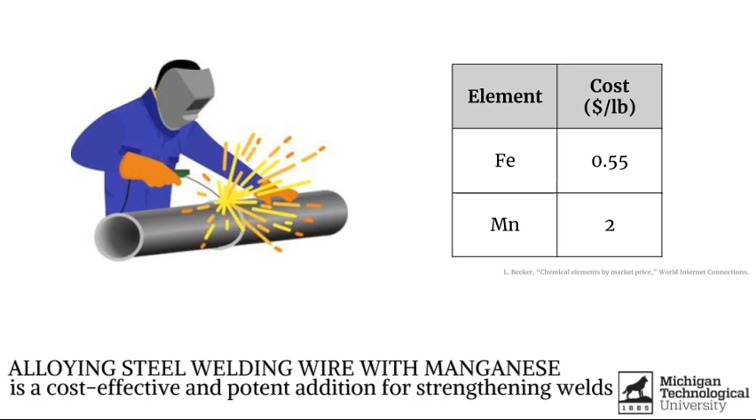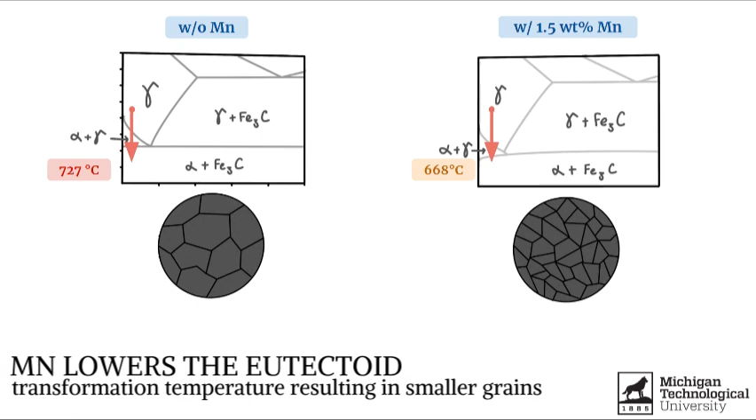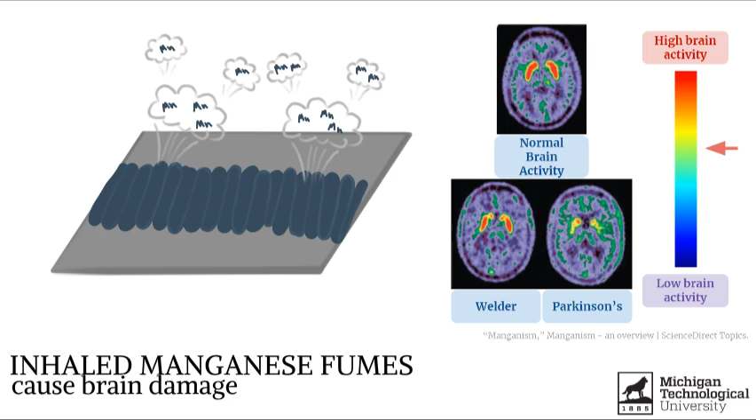Hobart manufactures welding supplies, and one of their main products is solid steel welding wire. Manganese is commonly added to the wire because it is a potent addition for strengthening welds and is also cost-effective. The reason manganese is effective at strengthening is because it lowers the eutectoid transformation temperature, which allows for more nucleation during cooling, resulting in a smaller grain size. Despite these advantages, manganese is a big health concern because during the welding process, manganese fumes are produced, and these inhaled fumes can cause brain damage similar to Parkinson's disease.

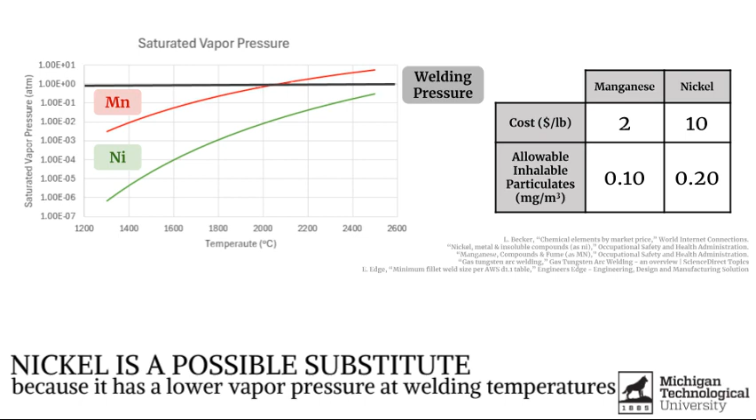Nickel is one possible substitute for manganese that our team has been exploring. It has a lower saturated vapor pressure than manganese in welding conditions, meaning it will not vaporize in the welding process. However, nickel is 5 times more expensive than manganese, so we are trying to find the balance between health risks and cost. Similarly to manganese, nickel also lowers the eutectoid transformation temperature, which again promotes nucleation over growth of the ferrite during cooling.

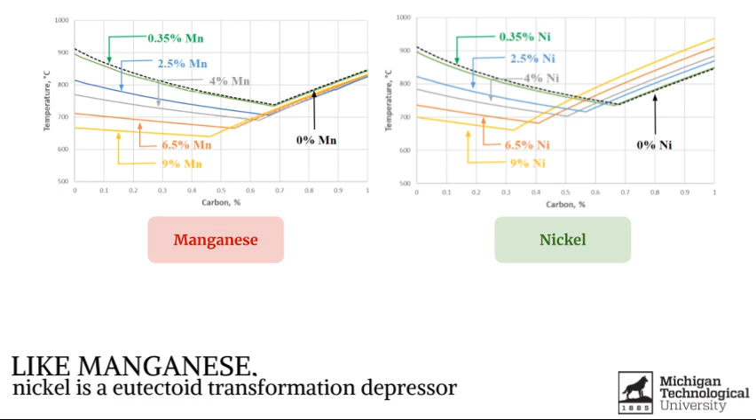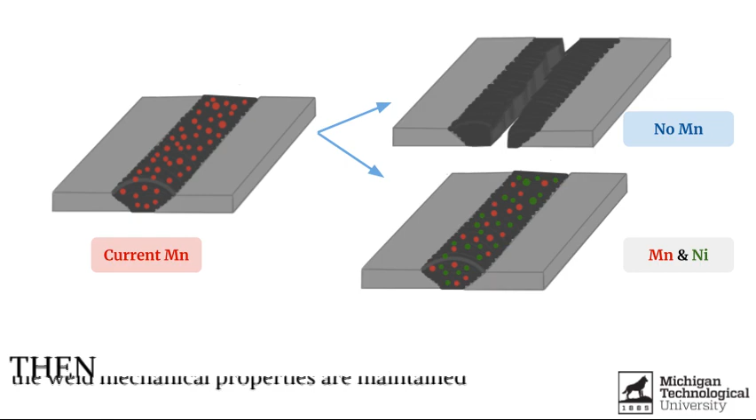This leads to a finer grain size in the microstructure, which helps strengthen the alloy. Because of this, we propose that if nickel replaces removed manganese in solid steel welding wire, then the weld mechanical properties are maintained because nickel refines grain size. With this hypothesis, we were able to formulate a design of experiments. The design of experiments consists of 5 alloys, and the mechanical properties of these 5 alloys will be assessed and compared to the high manganese wire that Hobart currently produces and sells.

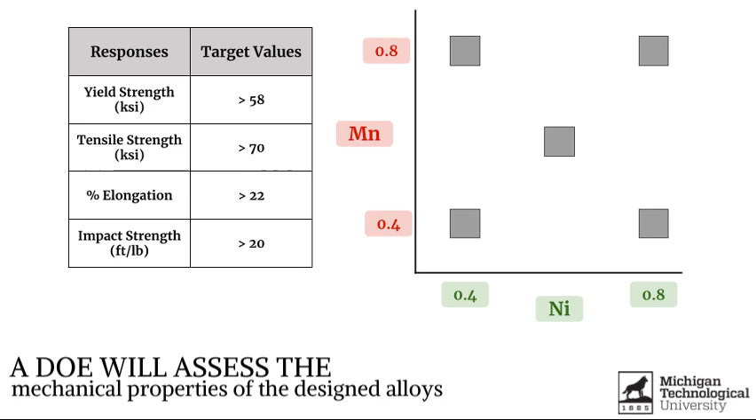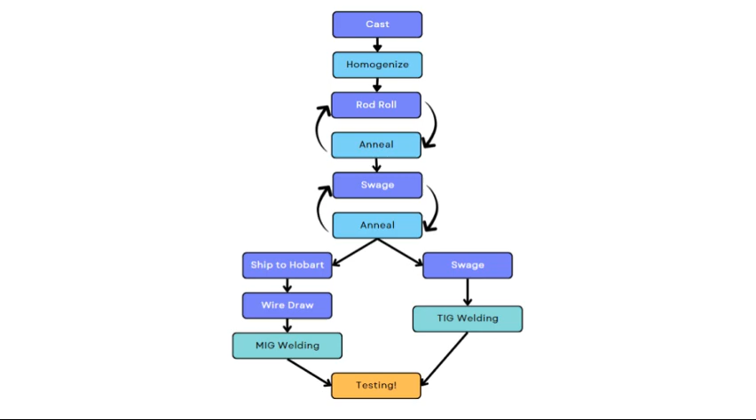Before any testing could happen, we first had to make our wire. This process started with casting and homogenization. Once homogenized, the bars were rod rolled and annealed as needed, and then swaged and annealed as needed. From there, most of the samples were sent to our sponsor for wire drawing, MIG welding, and testing, while a few of our samples were kept at MTU for further swaging, TIG welding, and testing.

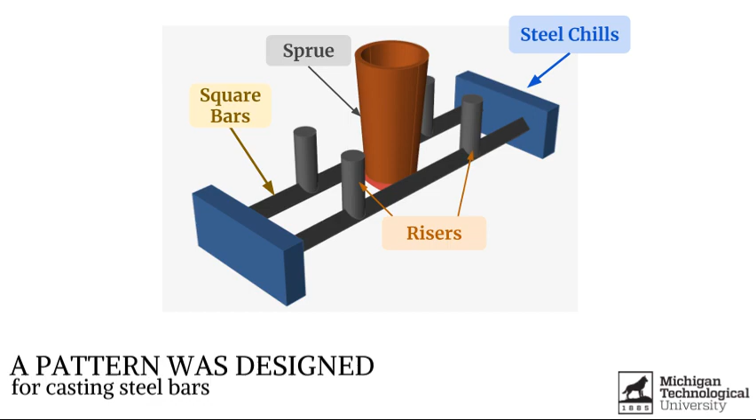To start off, we needed to design a pattern for casting. This is so we could make 16-inch bars with 3/4 inch cross-sectional side lengths. Inspire Cast, a casting simulation software, was used to ensure our bars would be free of porosity and cold shuts and would have proper cooling.

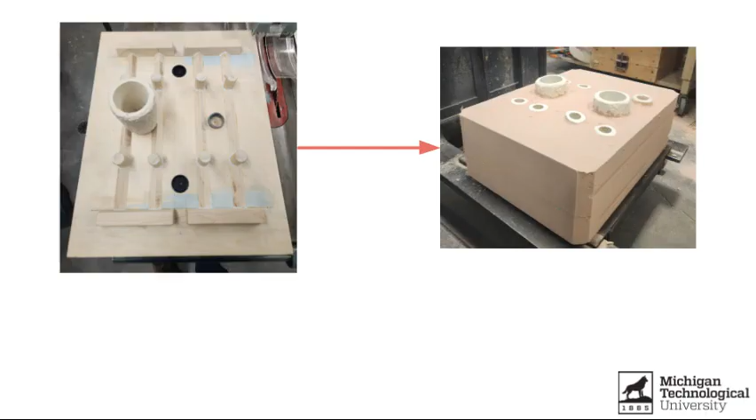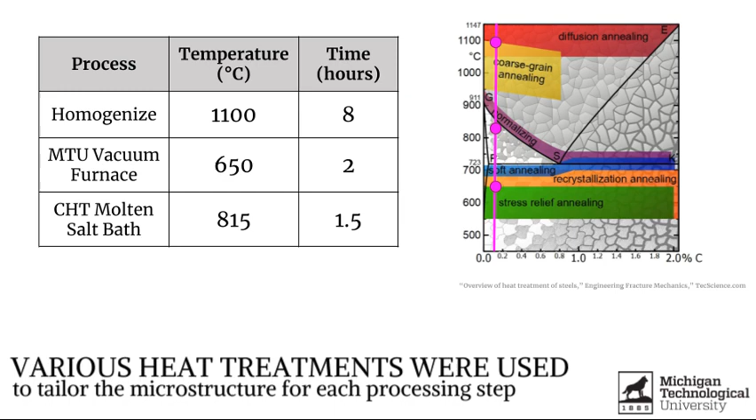The design pattern was then used to make chem-bond sand molds. They were designed to make a total of 4 bars per mold. Once cast, the sprue cups and risers were removed and the bars were machined down. Multiple heat treatment methods were used throughout the process to ensure homogeneity and proper strain relief for processing.

The homogenization time and temperature were determined using ThermoCalc simulation software based on diffusion rate of alloying elements. Annealing was used throughout rod rolling and swaging to relieve strain due to work hardening and prevent material failure.

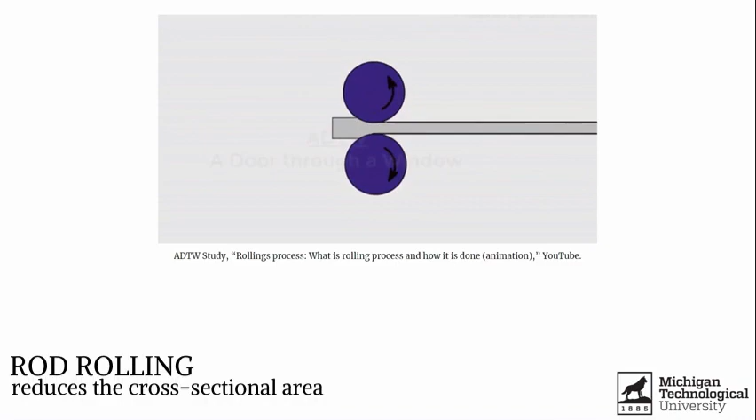Rod rolling uses compressive force between 2 rollers to reduce the cross-sectional area of a sample. This process was used to bring our 16-inch bars with a cross-sectional side length of 5/8 down to a side length of 1/4, which resulted in approximately 8-foot-long bars.

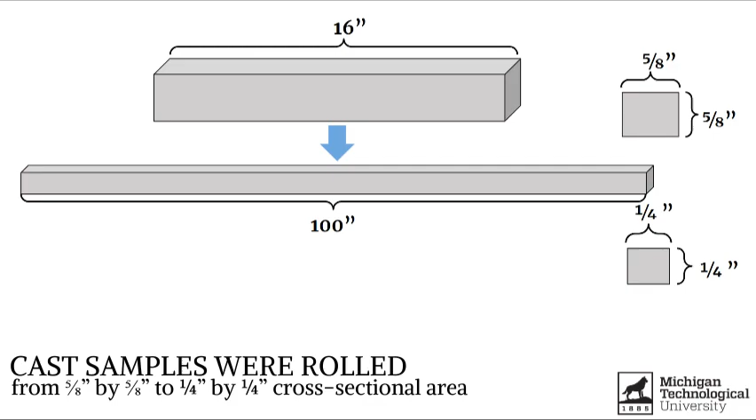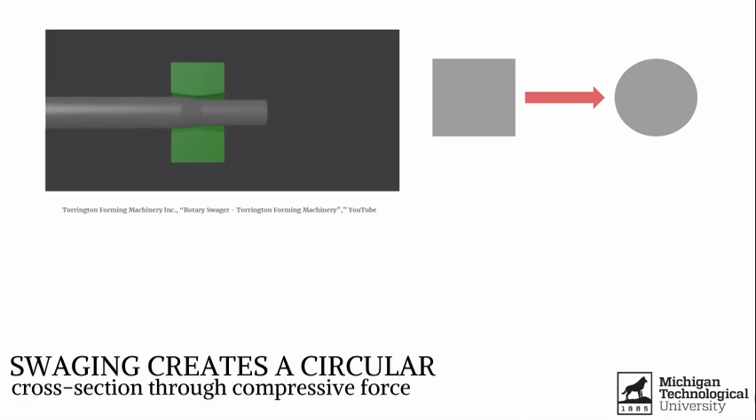Like rod rolling, swaging also uses compressive force to reduce the cross-sectional area of a sample, but instead of rollers, it uses dies that open and close around the sample, resulting in a round cross-sectional area. Our bars were swaged down to a 1/4 inch diameter rod before some samples were shipped to our sponsor. The kept bars were further swaged to an 1/8 inch diameter.

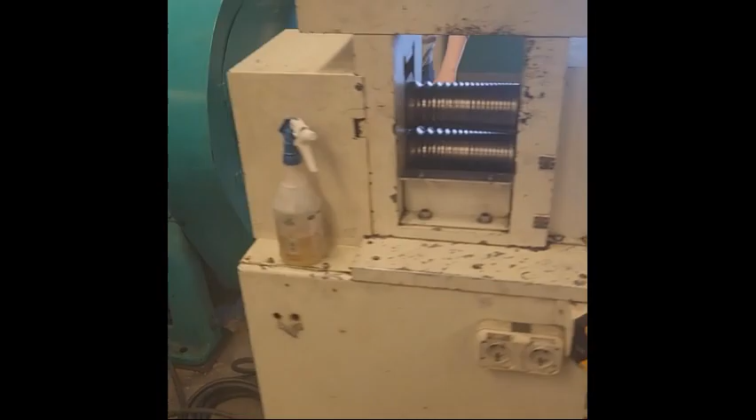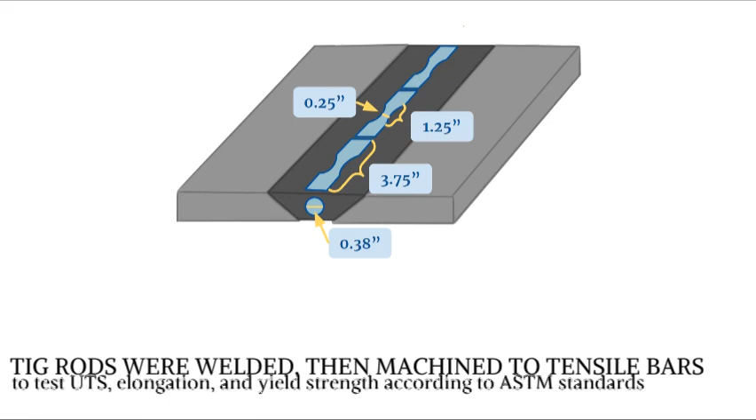The 1/8 inch wire was welded into a V-notch between 2 steel plates and then machined into round tensile bars to test the elongation, ultimate tensile strength, and yield strength of our alloys. At this time, we are still waiting on the results of our project to determine which alloy will perform the best.